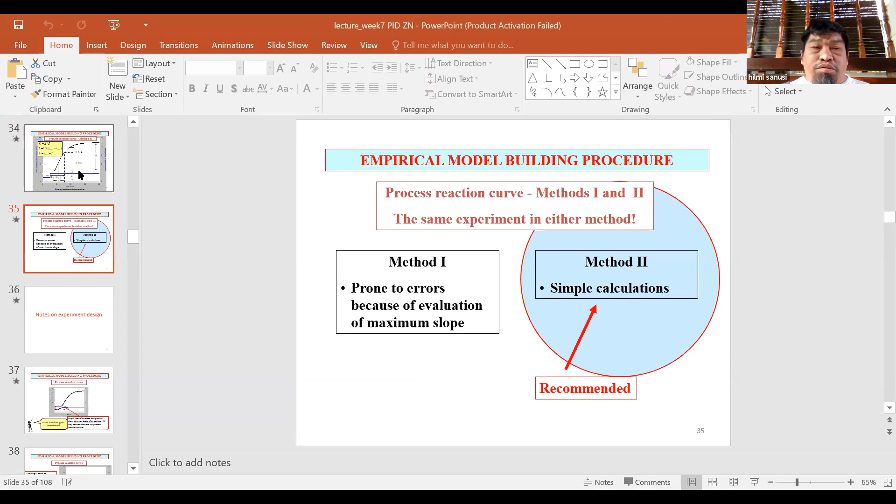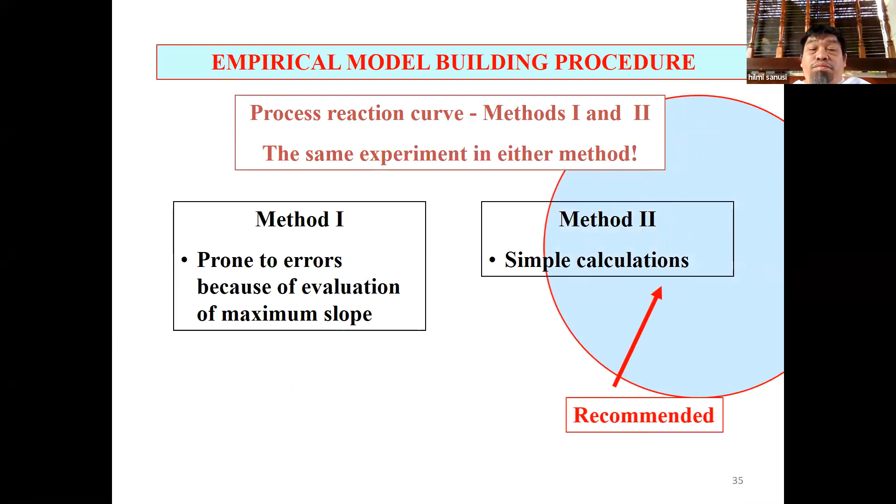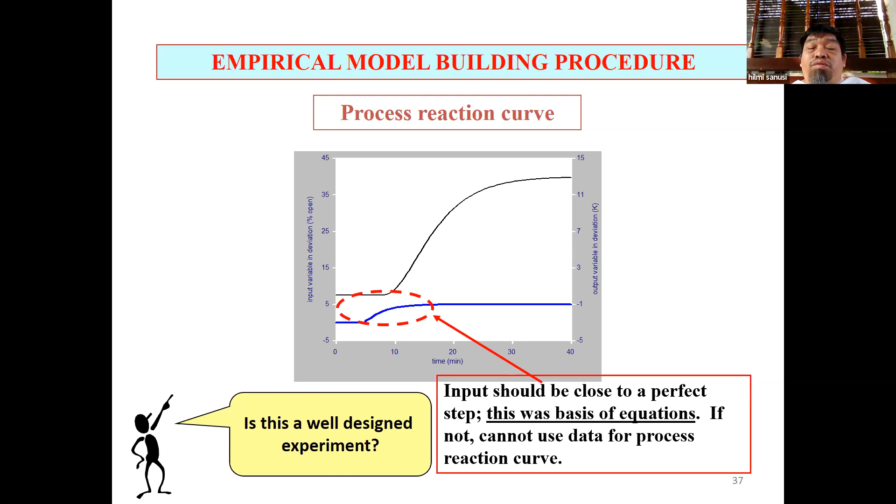So this is the dead band. So this input should be close to a perfect step, but this was basis of equation. So if not, we cannot use the data for process reaction curve. This is empirical. So sometimes you just have noise. So the output must be moved enough. So this is with a single step, you can see the signal to the noise ratio. So if we have this type of noise, can we use this in our calculation?

Okay, so we assume that there is a step. Then we have some delay. So this is dead band. And then you measure what is your input, your rise time. Then you have, bila dia dah rata ke atas tu, that will be your steady state. Then you take the 63%, that will be your rise time.

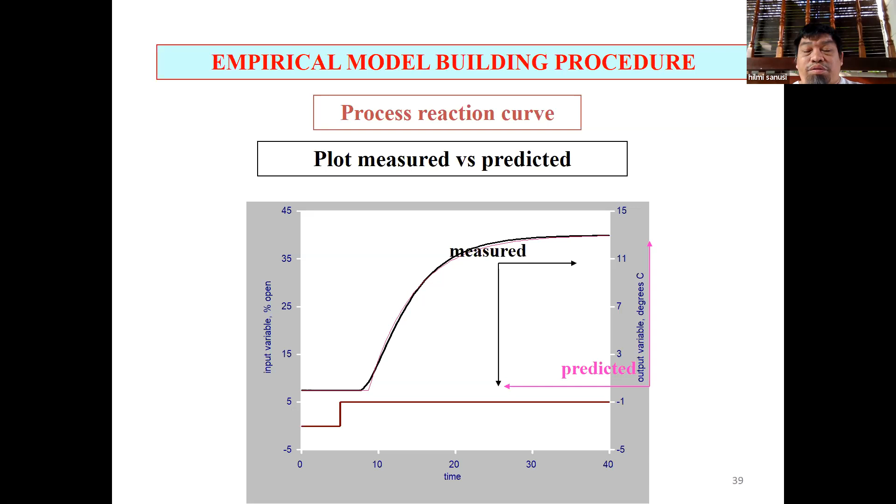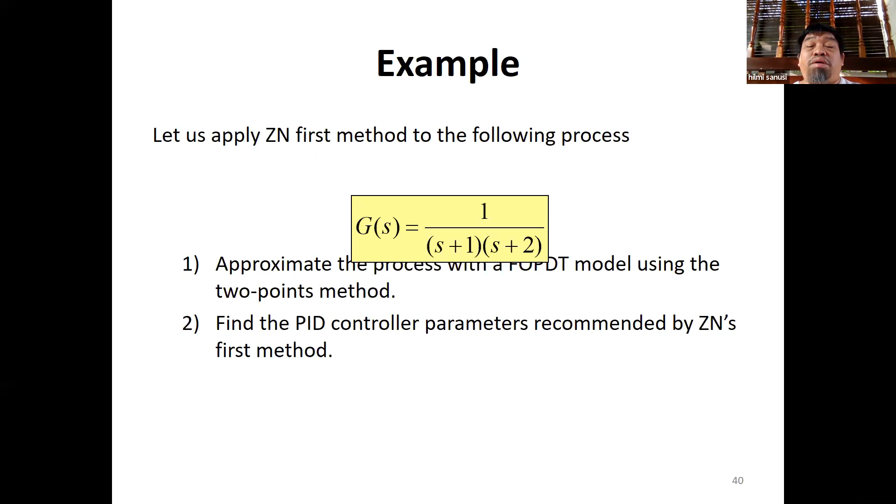So you can use a Ziegler-Nichols approach for 2-point methods. Then you find the PID controller parameter recommended by Ziegler-Nichols first method. And then this is the examples. You use this thing, and then you apply dalam your MATLAB, then you can see macam mana the response. Okay.

Ziegler-Nichols second method, this is ultimate cycle. So dia punya tuning dia slightly simpler. So first method use open loop. Second method, use closed loop. So if the process open loop is unstable, or if it is stable but does not give the S shape as you want in the open loop, so dia tak ada dead band. So you cannot find the dead band, and then you cannot find what is the slope. So second method is slightly easier.

So you put the process under closed loop control, and then you use a proportional controller. You vary the gain, and then you create a small disturbance in the loop by changing the set point. Means that you change the input, and then you change the gain. So it adjusts the parameter, proportional gain. So you vary the input. Let's say input daripada 1 jadikan 2 atau menjadikan 5, and then you bagi gain dia lagi besar. And then you record the gain, sampai dia start to oscillate.

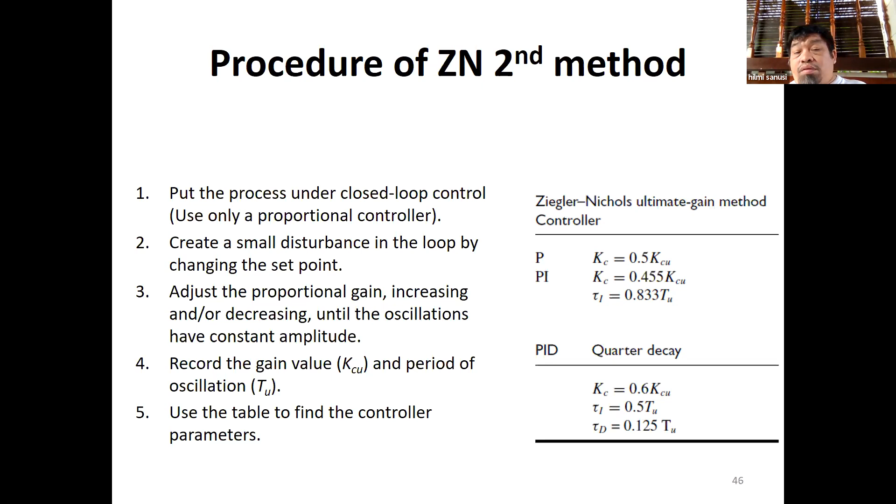Okay. So sometimes dia ada apa dipanggil sustained oscillation. So you change the set point, you change the gain. Say in this example, set point you change daripada 1 jadikan 200 degree Celsius, and then you change the parameter, you increase from 1 to 3, then daripada 3 some oscillation.

Let me see whose mic is on. So I'm asking to, sorry, somebody accidentally switched on the mic. Okay.

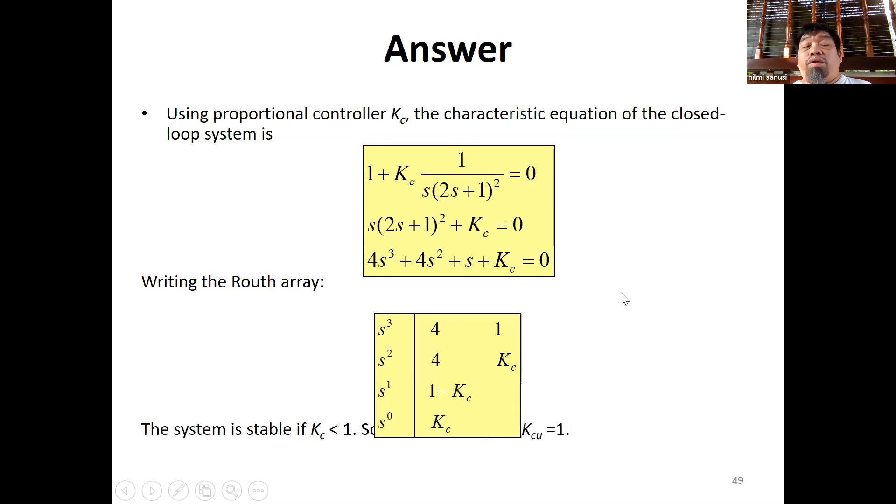Then when the oscillation frequency is stabilized, you have a constant amplitude of oscillation. So this is when the ultimate frequency is being used. So you just change your set point dengan gain. So you set the gain sampai they oscillate, and then you slightly adjust the input so that you have a constant amplitude of oscillation. Then daripada situ you dapat what is your period and what is your gain. Okay.

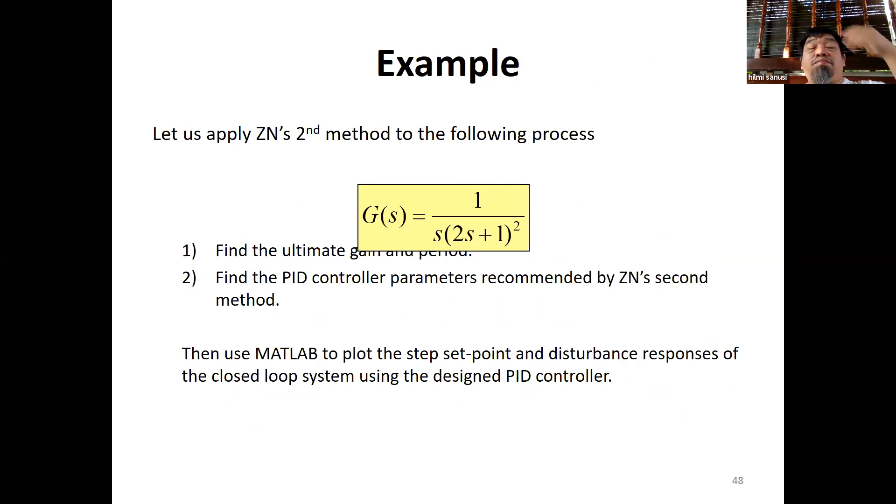So you can apply, masukkan kat dalam situ. So this gain is actually sama dengan what you gonna get dalam your root locus punya criterion. Okay. So you just apply, based on the ultimate gain, for PID, Kc is 0.6 times the gain of the calculation. TI is 0.5 times the period of oscillation. TD is 0.125 of the period of the oscillation.

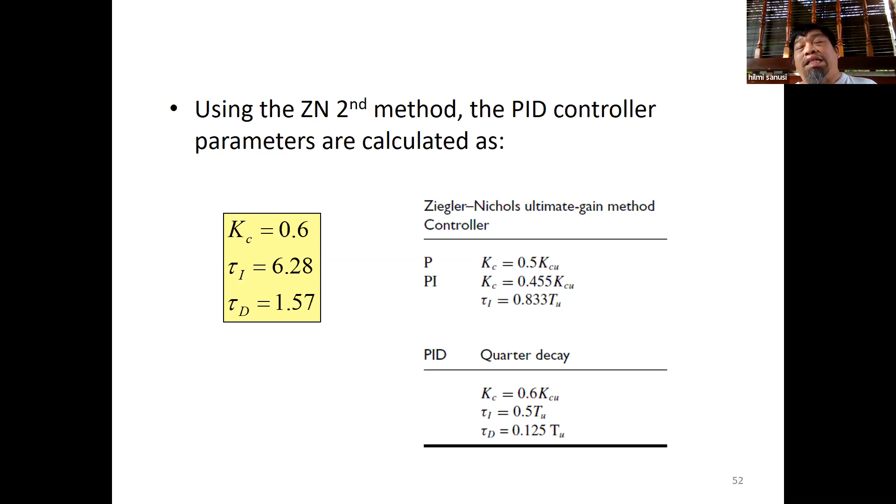You can see kat sini TD is about, berapa kali ni? 4 kali lagi kecil daripada TI. So this is quite normal. Kalau you nak main teka, selalunya TD kita set dulu. Nanti if you look at the assignment yang saya bagi, saya suruh you pakai visual methods. Nanti kita tengok visual methods. So selalunya in visual methods, kalau kita nak try, we set TD to be 10 times smaller than TI. That's a rule of thumb. Okay.

That's another method of finding the ultimate gain KC, by using root locus. We just move around the locus until it crosses S equal to 0, then you get your gain. So in this case, this is not experimental. This is based on, what's it called, simulation using MATLAB.

So you have two: one uses the real experiment in a closed loop system. The other, you build the closed loop, you simulate using MATLAB and you look for your ultimate gain for the oscillation. If you use MATLAB simulation, sorry, not just MATLAB, if you use simulation, then you are not adjusting the set point to get the oscillation. You just drive the poles so that you know that that location will oscillate.

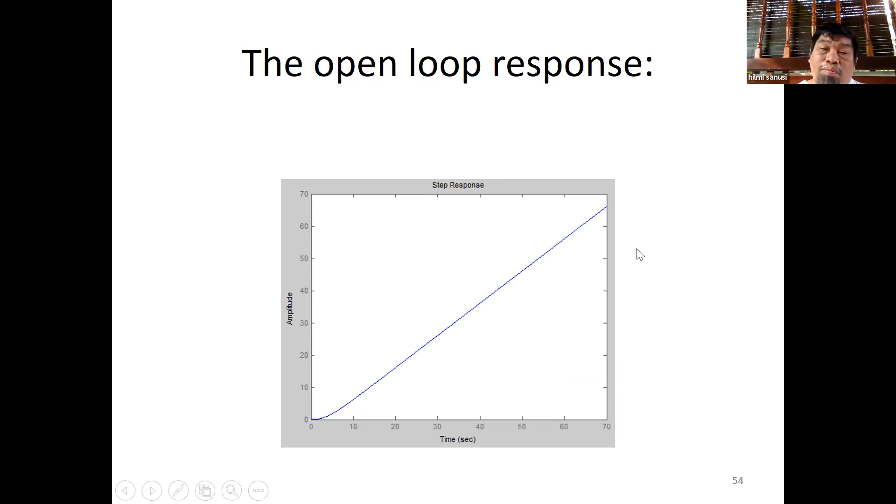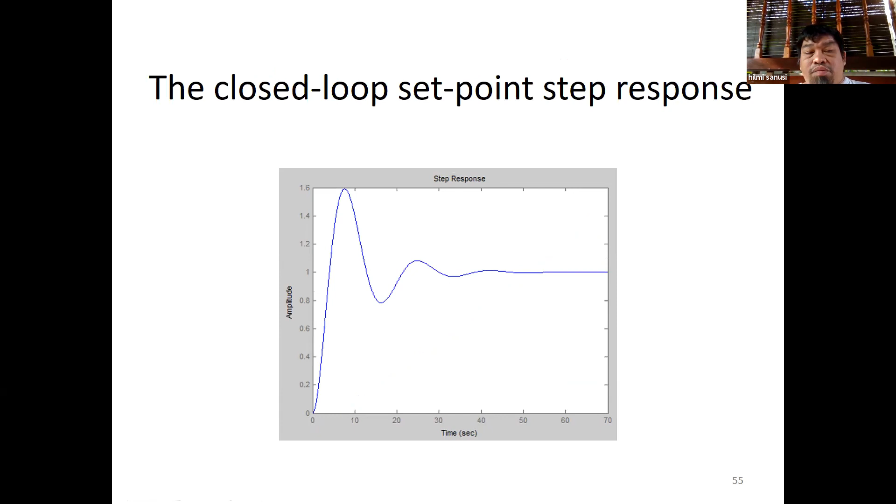So this is a simple conclusion of the second method. You set Ti to infinite, Td to be 0, and then use a proportional control. You just change its set point, meaning you change the input slightly, and then you increase the gain Kp from 0 to a critical value where the output starts to oscillate and produce a constant oscillation. That will be your critical gain. Okay.

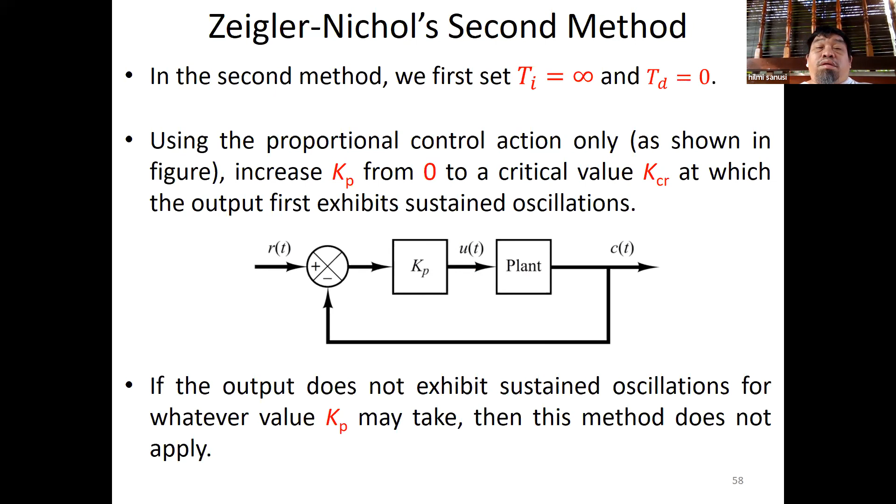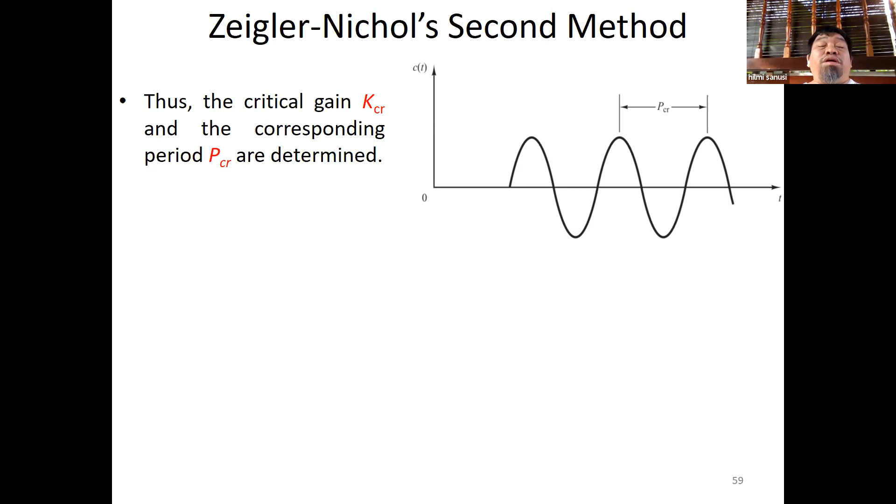So once you get your critical gain, then you'll get your period of oscillation. From there you find what your oscillation period will be. So you will get those two values, critical gain and period of oscillation. Then the table is good enough to give what will be the KP, KI, and KD.

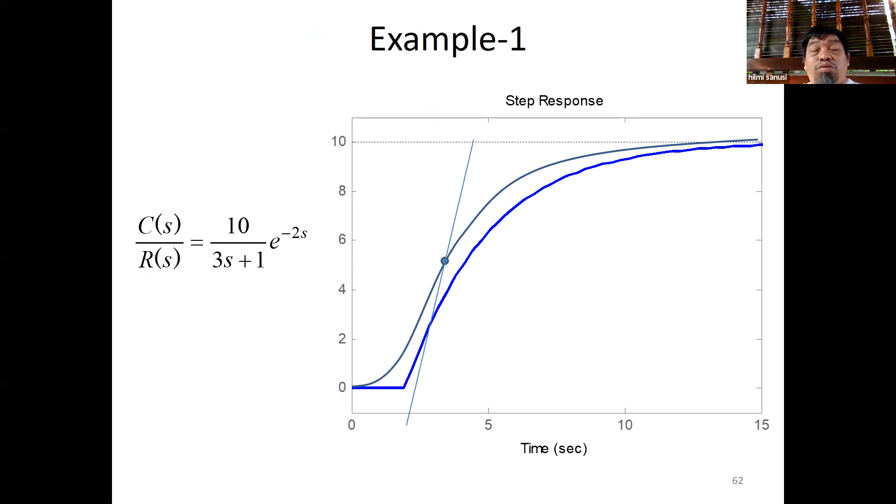This is another example. You can see how to do the tuning. Okay, can we? If, for example, it has an S shape like this and then you use the second method, yes you can. So the second method is based on closed loop oscillation. The first method, if you have just the open loop, it's not used in the closed loop. So that's another example. You can take a look at the examples.

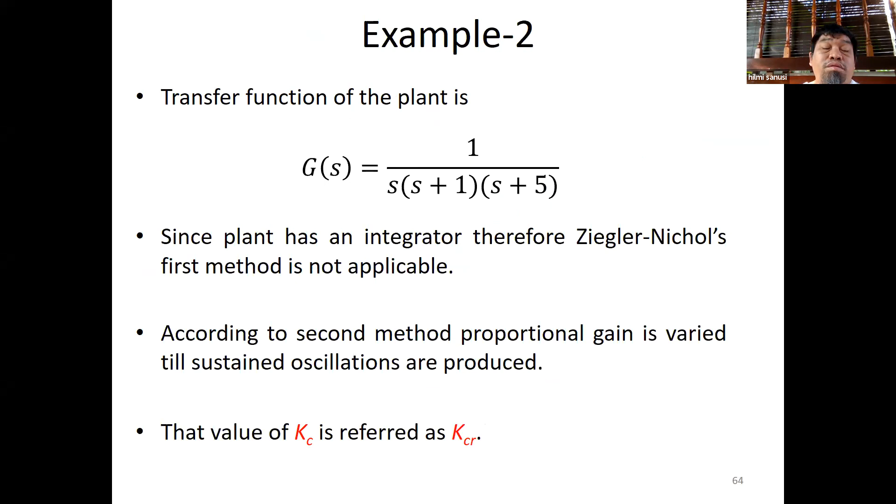So you get your critical gain. To get the critical gain, you can use root locus, or you can use the Routh criterion. And then you just drag this thing. So this is another example, using the Routh criterion to get your KP, your critical gain. Same thing. So once you get your KP, you put your KP in here, then you will get your J omega. You can use MATLAB to do this too. If using the Routh criterion, does MATLAB have it? The old one does, the new one I'm not sure. We can check.

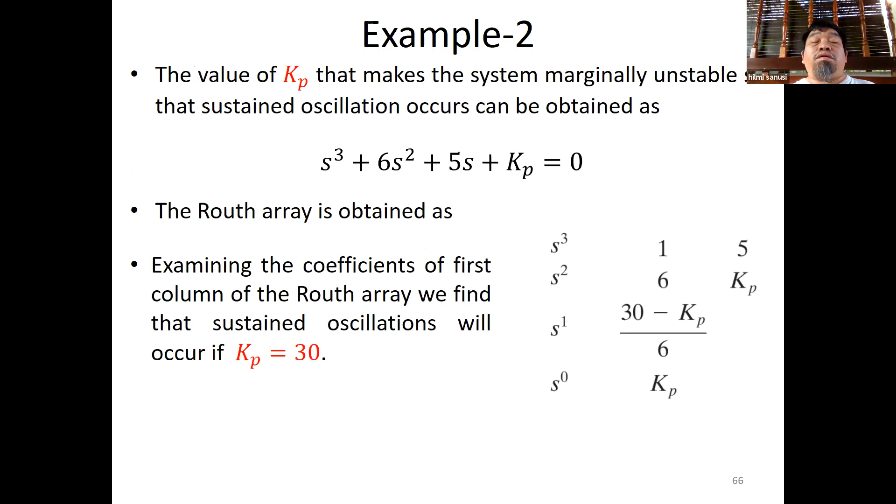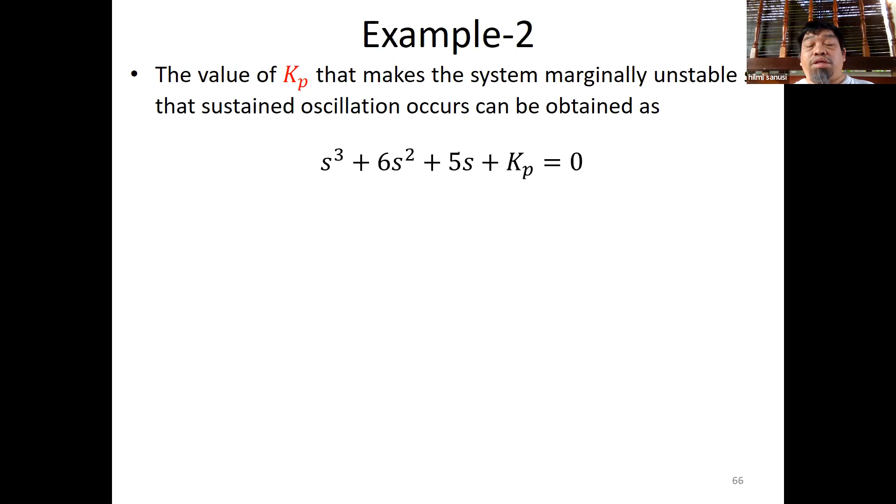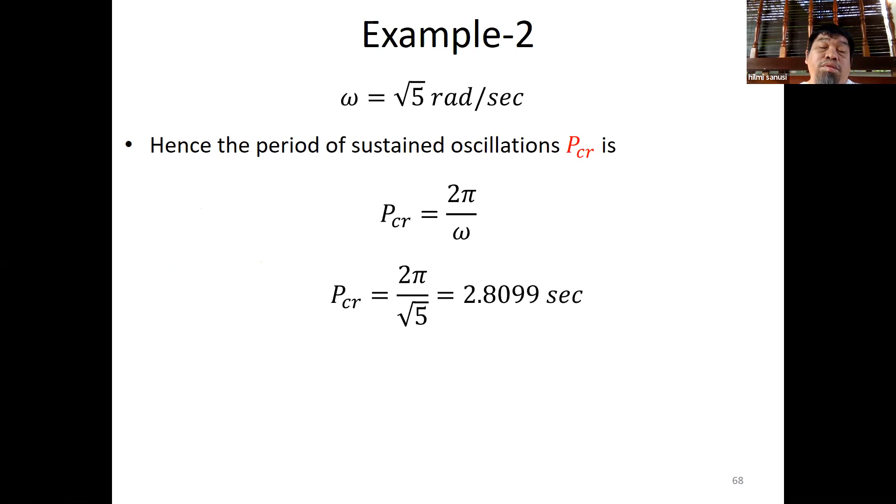Okay, if using this calculation, put your gain KP in there. If you look here, this is your transfer function. If you have your KP, then you get your closed loop. So KP over S(S plus 1)(S plus 5) plus KP. So from the Routh criterion, you put KP into this equation. Then you look for what your oscillation frequency will be. Once you get your frequency of oscillation, you get your period, like here. Your period is 2 pi over omega. Okay. Same thing.

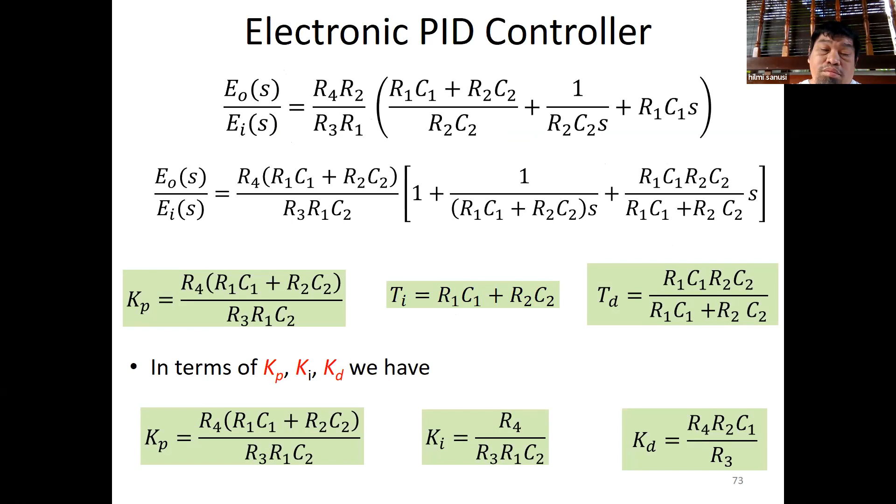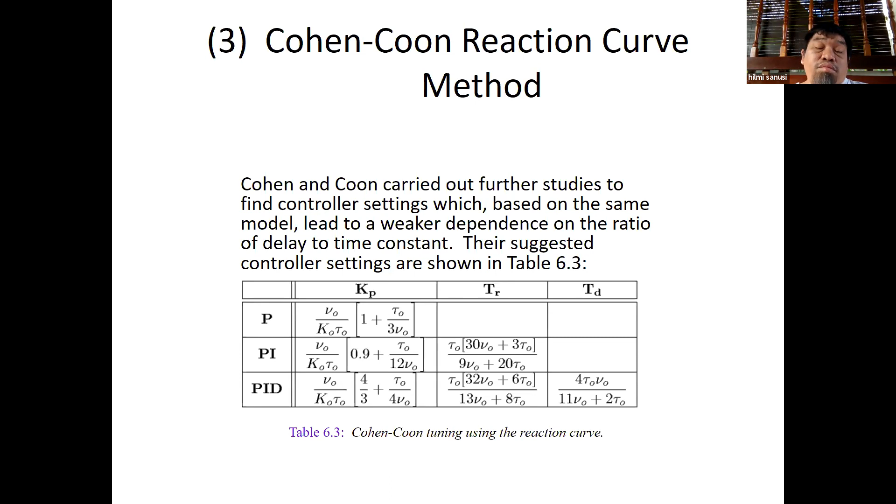So this method works well on processes where the dead time is less than 2 times the time constant. So kalau kita tengok sini ni, this is dead time, tau, dengan the time constant. So this method works well when the dead time is less than 2 times the time constant, suitable for use on self-regulating processes based on characterization of the process by a simple first order model with steady state gain K, time constant and the dead time.

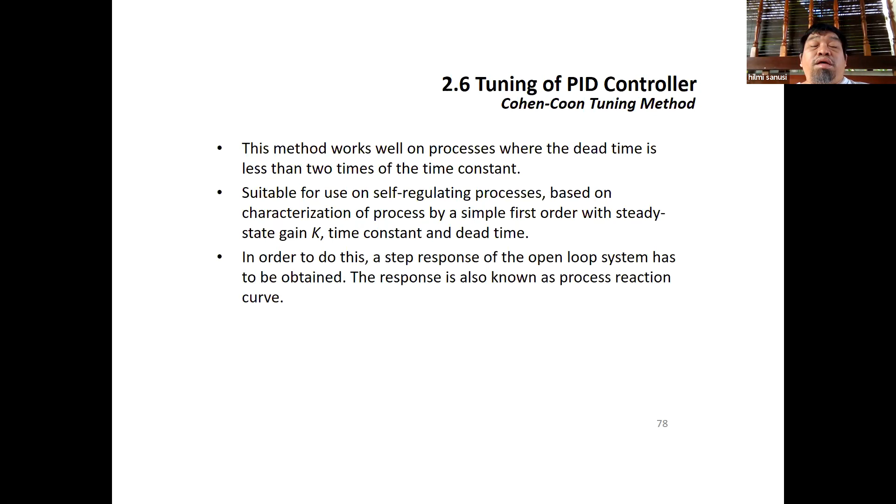So in order to do this, a step response of open loop has to be obtained, and then the response is also known as the process reaction curve, and then the reaction curve must cover the entire test period from the introduction of the step until the system reaches a new steady state.

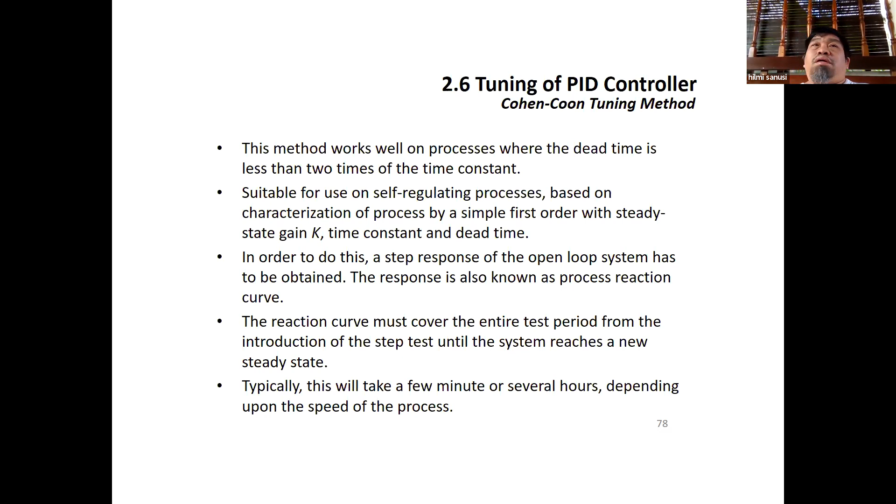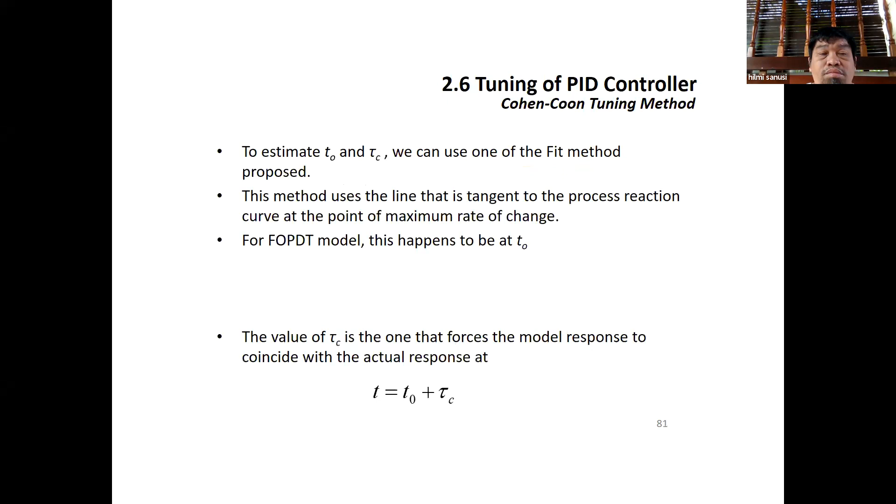So this is the gain. And then this is the rise time. Okay. From this, just plug into the Cohen-Coon tuning methods. Okay.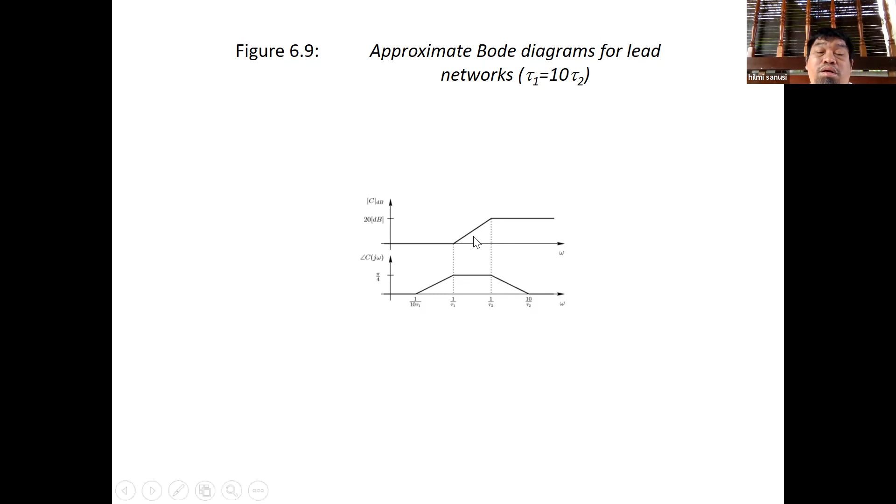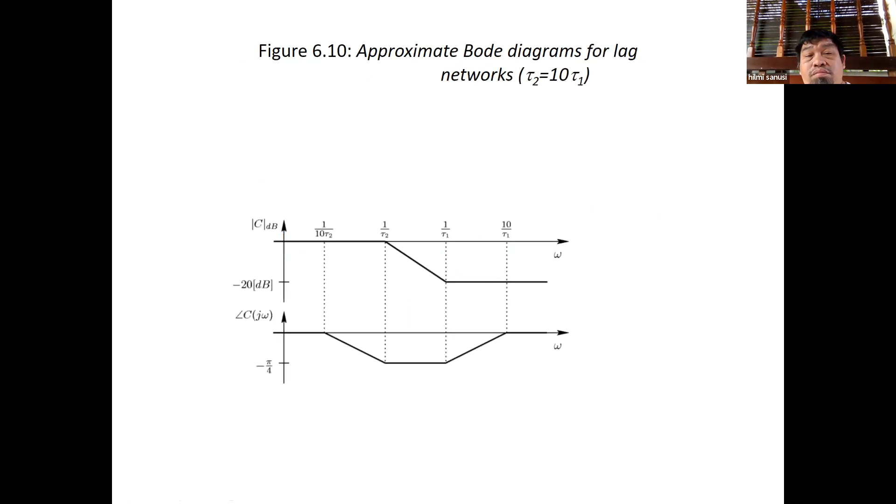So this is the magnitude, this is the phase. So the effect is about the same as the reaction in PID. Okay. So Ziegler-Nichols closed loop tuning methods.

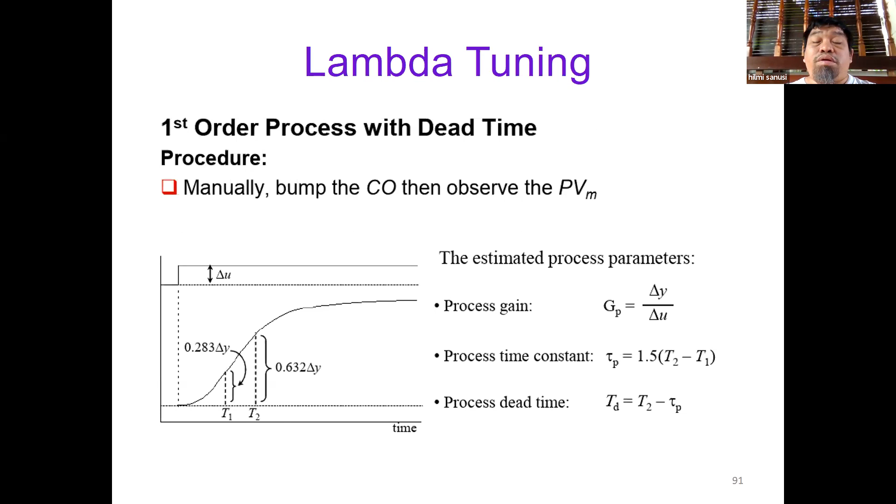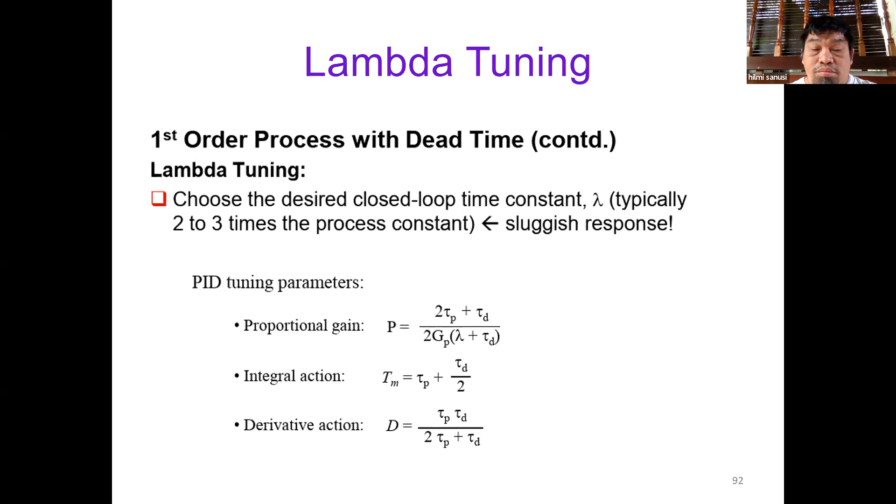So dia varykan value, typically 2 to 3 times the process constant. So this lambda is the one that you want to tune. Okay. So this is how you want to implement lambda tuning. The filter time constant should be less than 1/5 of the process time constant. The closed loop time constant is usually greater than the process time constant. Okay.

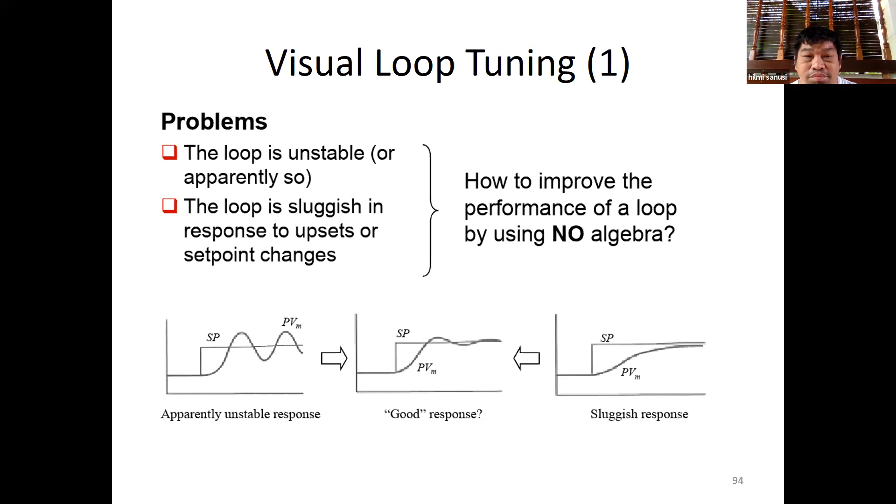So first you look for instability. Dia ada oscillation ke tak? If there is an oscillation because of excess feedback or being perturbed periodically by another process. So the procedure is to put the loop in manual, and then in the manual loop the process appears to settle down. So kita tengok dia punya response. And then kita tengok if the oscillation is caused by too much or too little gain in the forward gain, KI ataupun KD, or in the combination.

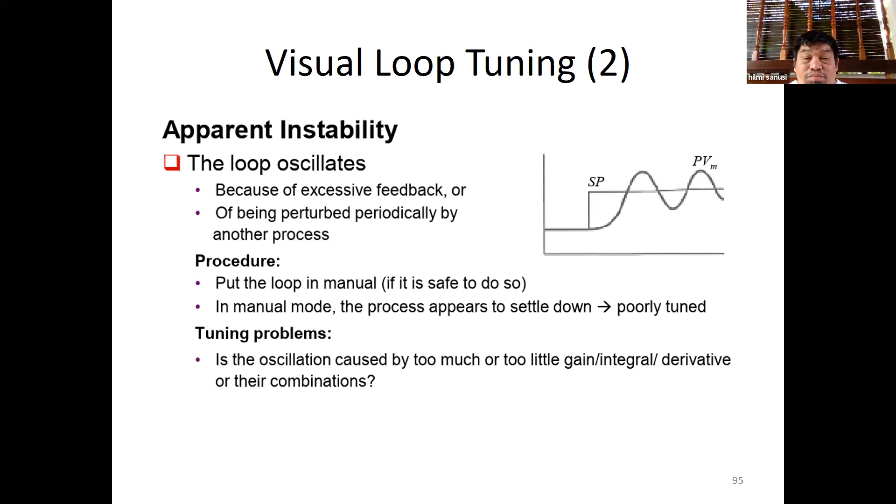So macam mana kita nak tahu? Kita just vary some of this gain. Okay. If the value of IM is less than half of the oscillation period, tau, so first you increase the value of integral. And if the value of integral is longer than the oscillation period, it is safe to decrease your proportional gain.

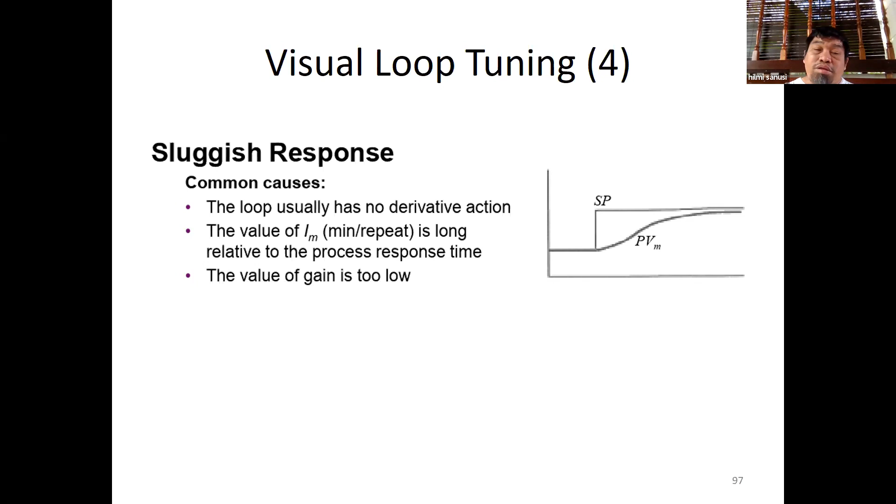So kalau the system tu sluggish, slow, so you set the I to the longest, and then set your derivative to be 0, and then place a controller in manual mode. Then you increase your gain.

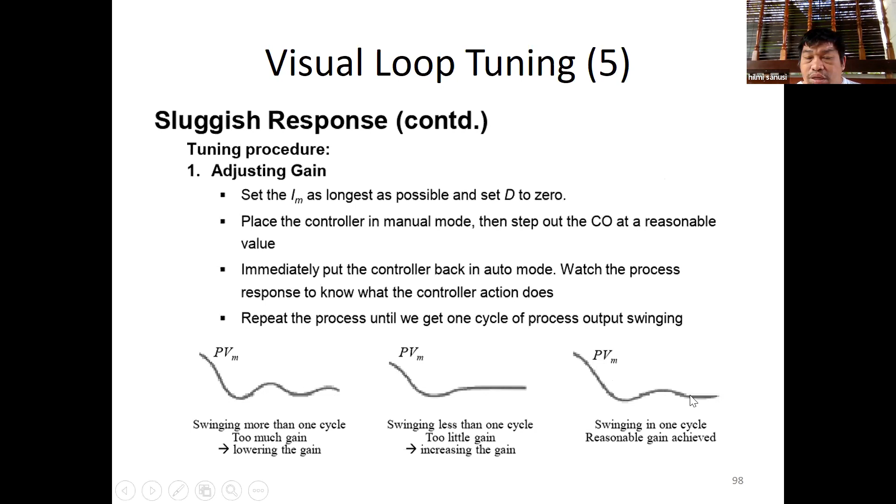Okay, so you repeat this thing sampai dapat one cycle of process output swing. So this is swinging in one cycle. Dia swing, 1, 2, lepas tu dia mati. Kalau ini 1, 2, 3, 4 ini setengah cycle. This is one cycle, and then the steady state.

So once you get this, you place a controller in manual, immediately put the controller back into auto mode. Means that you introduce the feedback, and then you masukkan balik dalam, so that you can adjust PI dengan D, and then we get a new PV back to a set point about half of the fastest as it move away from the set point.

So the response with a reasonable gain, dia ada one complete cycle, and then you increase slightly KI, and then kita dampen this thing dengan your KD.

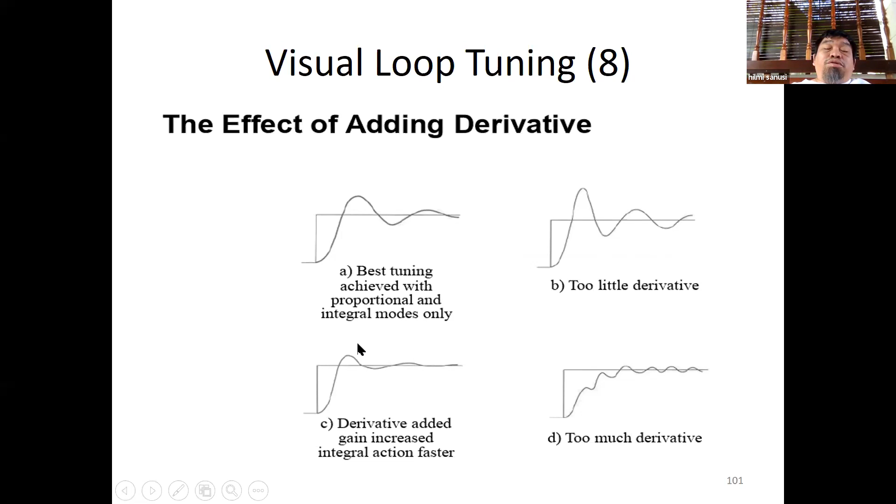Auto tuning, saya tak masukkan lah dalam apa, tak ada sebenarnya dalam syllabus. Tapi memang selalu ada auto tuning ni, pergi mana-mana pun orang akan cerita pasal auto tuning. Auto tuning ni let the PID tune by itself. It will self-adjusting the P, the I dengan D. So you don't need to do anything, it will adjust by itself.

So how can we do this thing? So the process is non-linear or operated under widely varying condition. So you need various combination of tuning parameter for different operation condition. So this thing you can accomplish by using previous experience yang operator dah buat. Kalau dia buat macam ini, dia letak P value je macam ni, KI, KD value, it will looks like this. So based on this parameter, kita masukkan di dalam jadual.

So the process characteristic will change rapidly. So you have your frequent manual changing and tuning parameter cannot be expected to be able to produce satisfactory result. So the user doesn't have the knowledge or experience for the successful manual tuning.

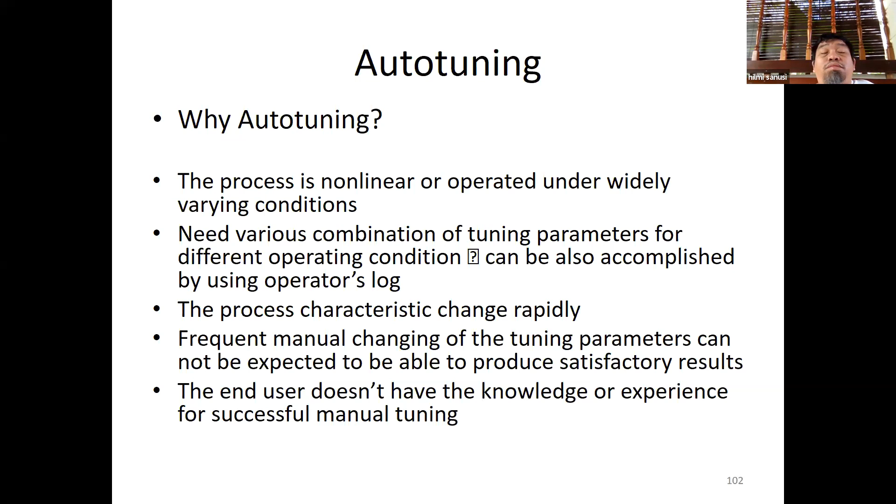Kadang-kadang ada orang guna black box tuning, black box PID. So you don't need to know the system. So dia pakailah artificial neural network to do the tuning. So dia masuk, dia pakai previous value, previous experience, let the machine learn by itself. So ini AI lah, artificial intelligence.

Kadang-kadang kita tak pakai macam tu, kita pakai auto tuning tapi yang lebih robust. Saya pun tak ingat apa benda yang saya buat sebelum ni. Kalau saya ingat, saya beritahu. Satu lagi dia gunakan table. Dia panggil scheduled tuning. Satu lagi dia pakai on demand tuning.

Satu lagi dia pakai online tuning. Online ni it will change. Dia tak ada break off. Dia continuously dia will change. Kalau jadi macam tu, dia terus tukar.

Siapa yang tak jumpa pula siapa menyanyi ni. Siapa menyanyi ni? Sampai ke bawah. Vishnu tak ada mikrofon. Vishnu bisu.

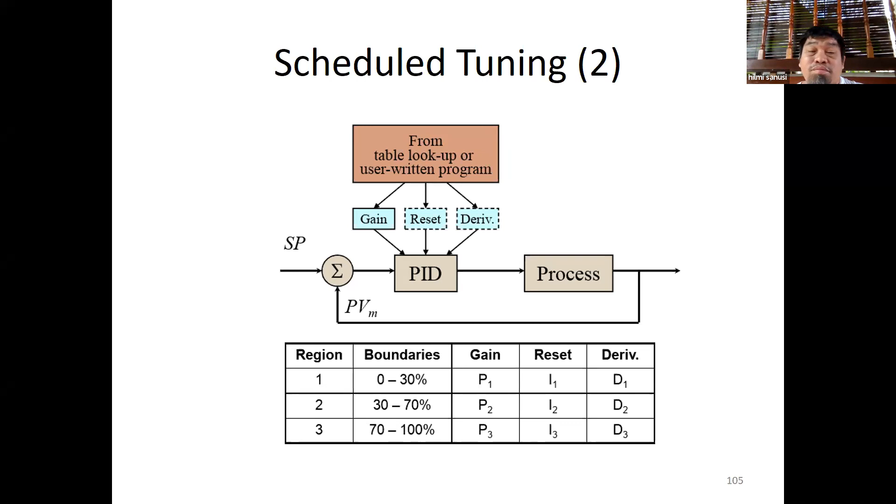So for on-demand tuning, if it's open loop, we directly use Ziegler-Nichols lambda tuning. If it's closed loop, we use relay feedback auto-tune, motivated by Ziegler-Nichols closed loop, and then tune. Or the user uses a tune button to start the tuning procedure which is carried out automatically.

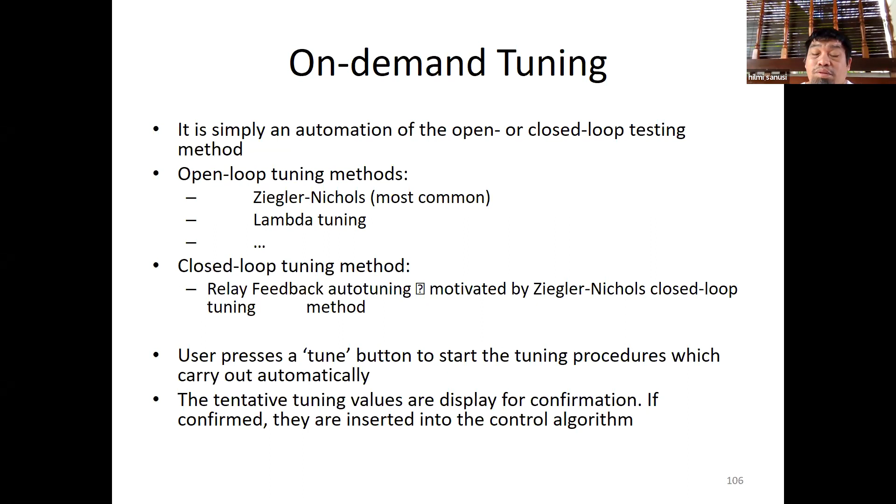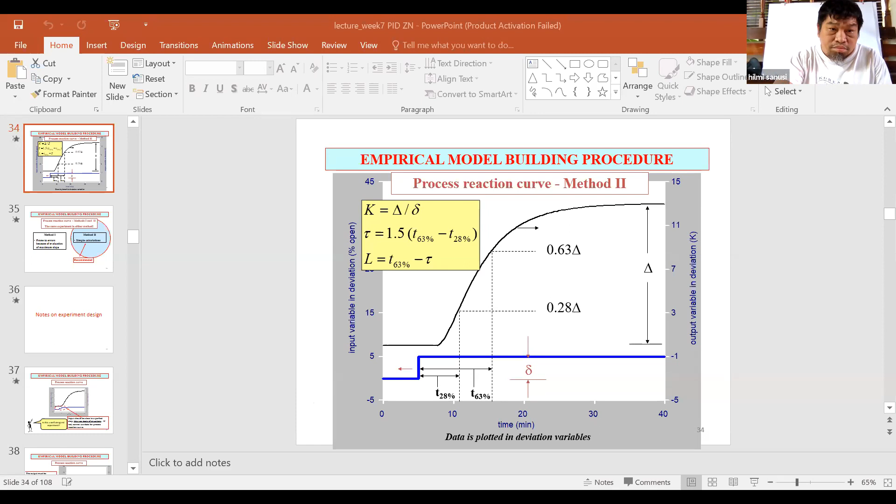I found a very good note by Alberto Bemporad from the University of Trento, Italy, on loop shaping. This is a very nice note, I'm very interested to use this note for the class. So I'll do a few things.

So this is what the relation is if we look at QFT. So how do we get the relation between time domain and frequency domain? What is the relation between time domain and frequency domain? How can we relate this?

Anybody? Let me turn on chat, let's see. Where is my chat? What is the relation between frequency domain and time domain? There must be some relation between frequency domain and time domain. Okay never mind, this is a bit difficult.

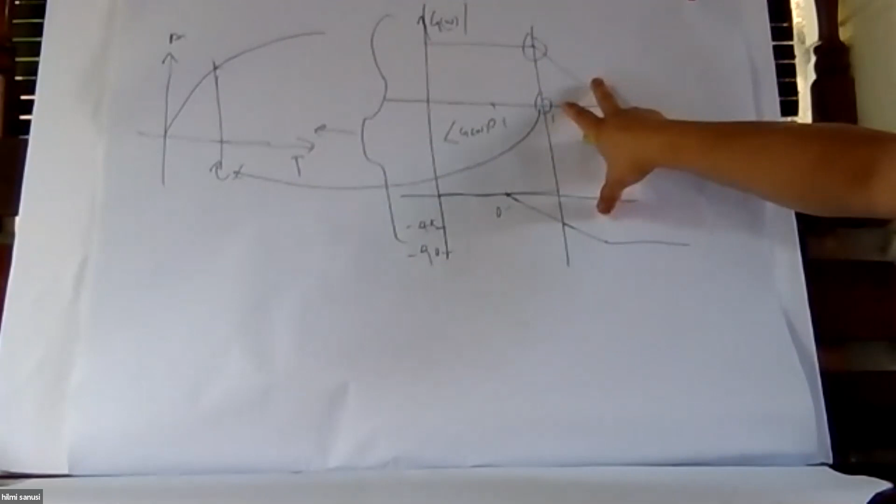Come back to this later. So I will... okay.

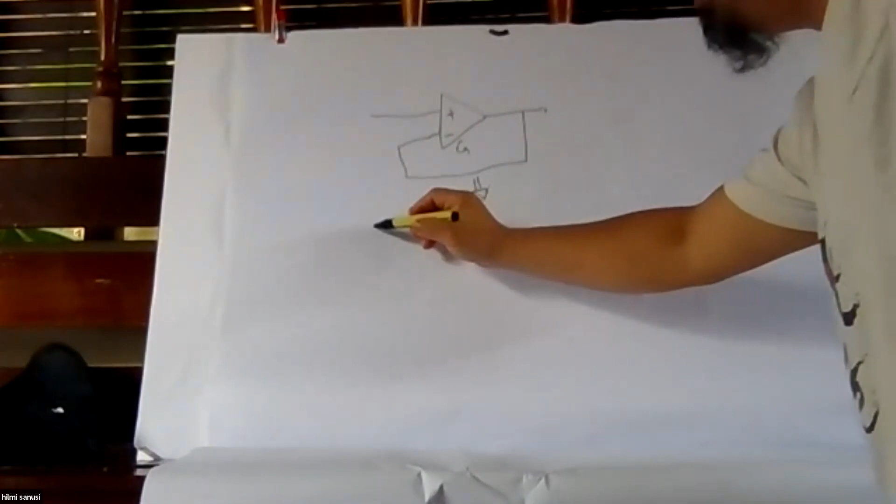Let's say I have an op-amp. Let me unshare the screen. Stop, share. Okay. Let's say I have the op-amp. Okay. Op-amp ni dia ada open loop gain. So this thing sama juga dengan kalau kita tengok kat dalam control system, this is something like this. This is gain. Unity feedback. Gain kat sini ni contoh open loop gain 300,000. So this is 300,000.

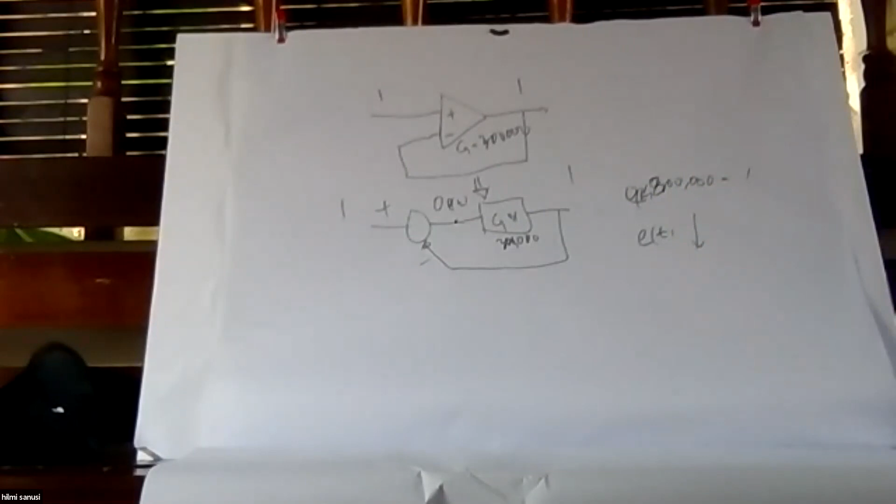So apa yang kita nak? This error to be very small. The smaller the error, the better. So kalau macam ini, kita nak bagi error ni lagi small, kita kena bagi gain ni lagi besar. So maksudnya error ni 1/300,000. Kalau saya ada sini 800,000, maksud error ni 1/800,000. So I will make this error to be very small. Kalau misal kata output saya macam ini, my gain ada some response like macam tu. Say this is my gain amplitude, contoh lah. And then my output will have something macam tu.

So kalau saya feed this thing back, saya tolakkan dengan satu, so dia akan ada reverse, and then I have the error. So this is the thing yang kita nak tengok, how the error will actually behave. Itu yang sebenarnya kita nak tengok. Because this is the output. This output kita tolakkan dengan kita punya input, that will become your error. So error times the system will get the output. So kita nak tengok macam mana kita nak buat satu controller so that this controller actually will modify the error signal. So kalau kita ada certain frequency band of the system, and then output tu ada certain frequency band, so kita nak filter.

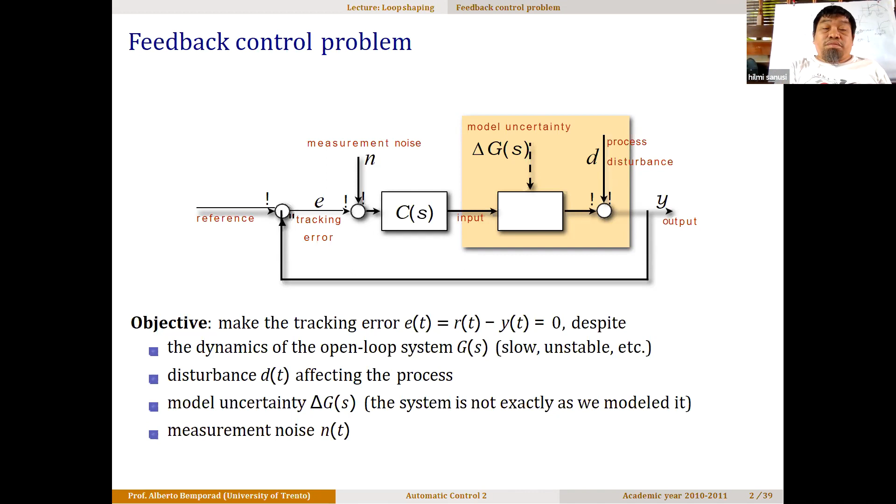So to achieve the objective, kita nak design satu feedback control yang satisfying a number of requirements: the stability in the nominal condition, stability in perturbed condition, static performance, and then performance transient dengan frequency response yang can reject noise and attenuate, so that it will be insensitive to the measurement noise. And then kita nak controller tu to be feasible.

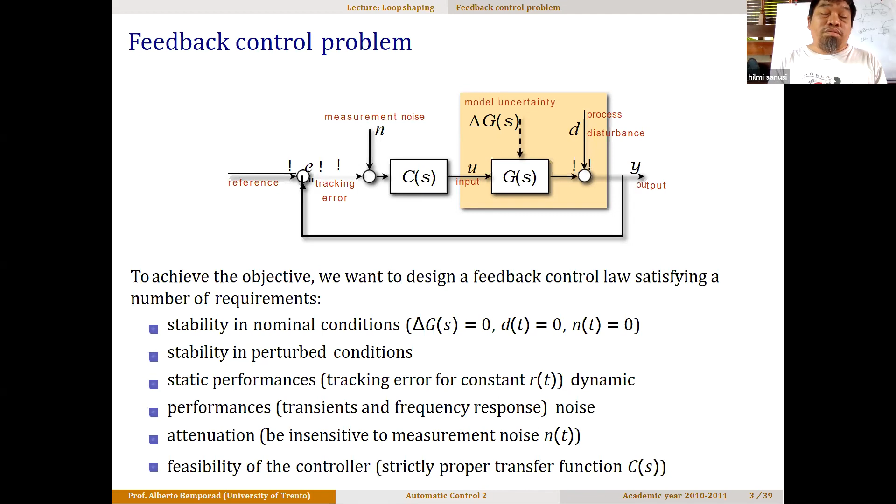For this, if we have a system G(s), then we will choose the controller or the compensator to shape the loop function so that this will give us the bounded criteria that we set. And that's why this is called loop shaping.

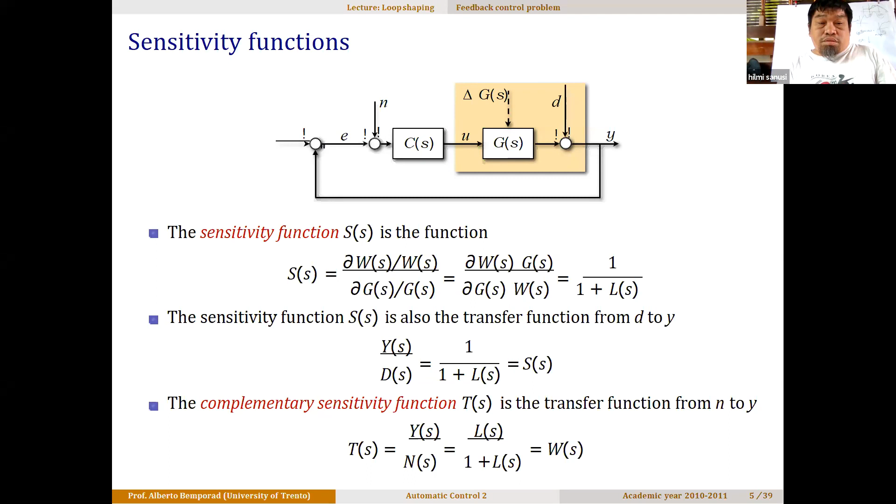So kalau saya ada transfer function and then complementary to the transfer function, if I add this thing up, how can we make this thing small? So the solution is to keep the sensitivity function to be small at low frequency. Then we have the closed loop punya system magnitude to be 1. So this thing will be very good for tracking. To keep the complementary sensitivity to be small at high frequency, then this thing will have a good noise rejection.

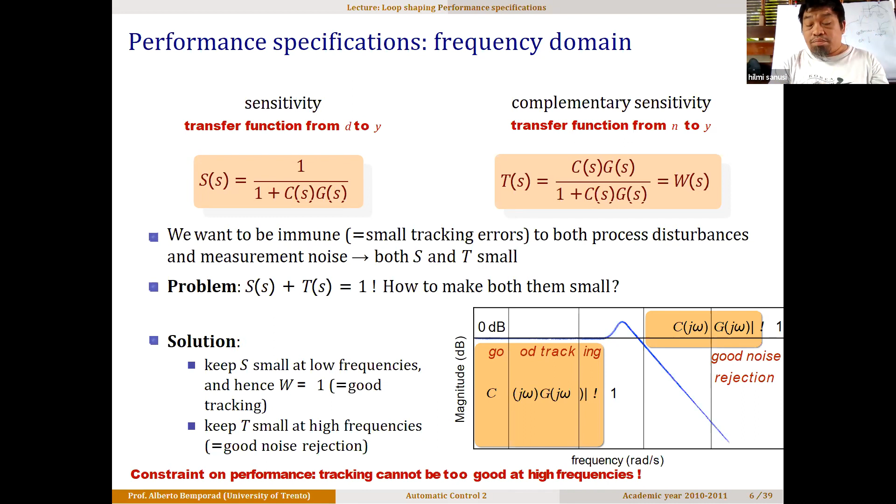So the performance specification in frequency domain, we usually refer to the regular closed loop system, to the similar second order. So we have this 1 plus 2 zeta over omega n s plus s square over omega n square. So this is sama dengan s square plus 2 zeta omega n s plus omega n square. Same thing, kita ambil omega n bawa ke bawah semua. Okay. We have the resonant peak, and this is the maximum value of the closed loop punya transfer function.

And then the bandwidth of the closed loop system is the range of frequency at which the magnitude of the closed loop system is, apa dia panggil, 20 log, is about the amplitude in the log. So this is within the minus 3 dB. So this is the bandwidth.

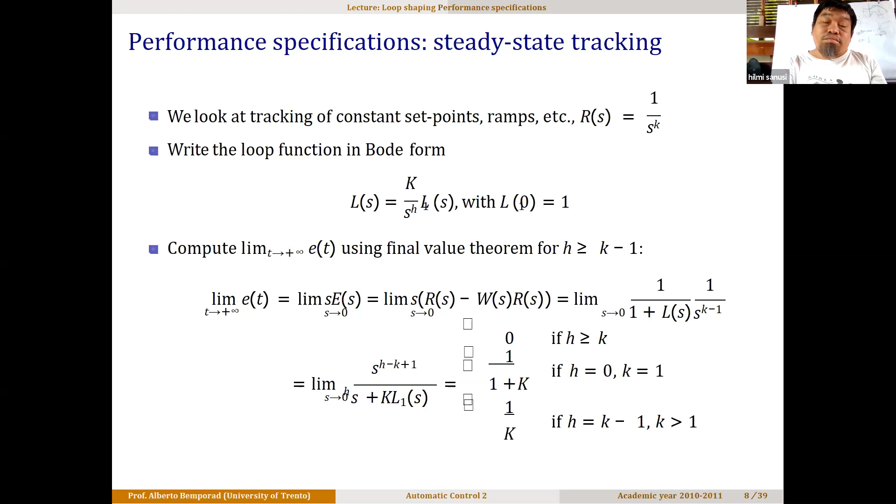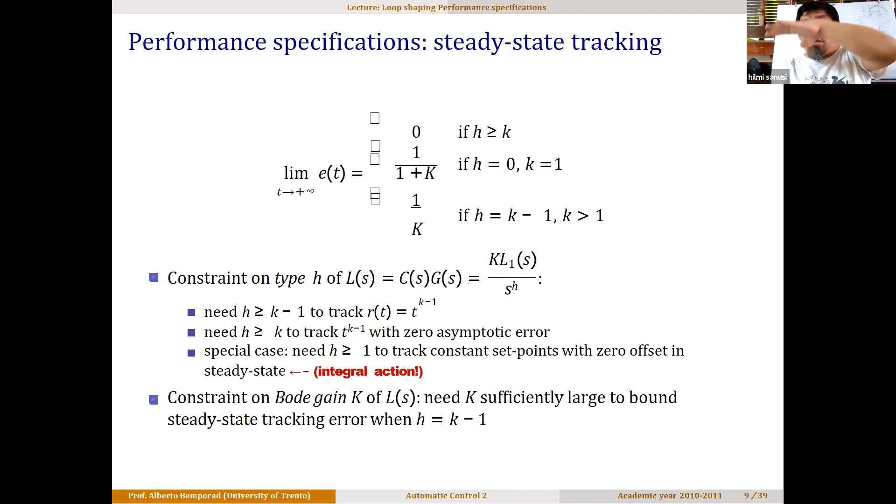So the constraint of the Bode gain of the forward loop will need some gain sufficiently large enough to bound the steady state tracking error, apa nama ni, poles just 1 degree higher than your zeros. Contoh dia s square plus something something over s cube plus something something. Okay.

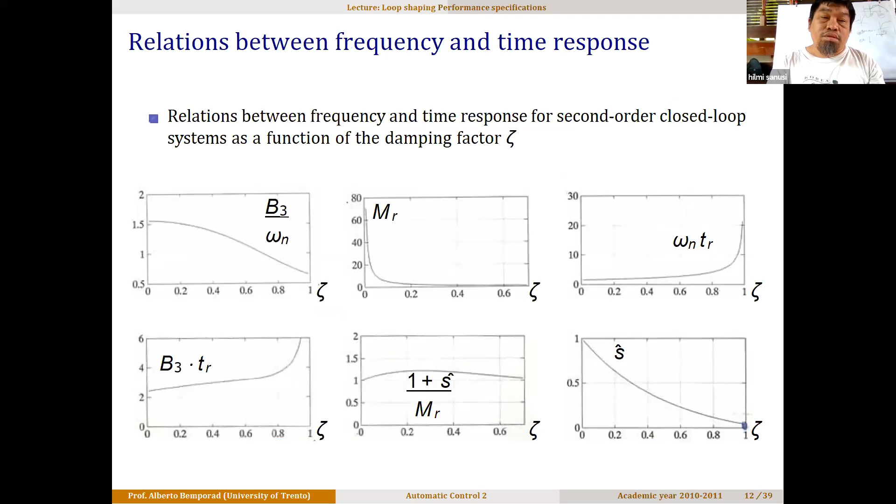So the relationship between the frequency and time response in the second order closed loop as a function of damping factor. So boleh tengok sini, this is zeta dengan omega n. So the controller synthesis through loop shaping. So apa yang kita nak? Kita ada typical loop function as specified by h, and then kita ada tracking error in the steady state. And then kita nak some dynamic to the system.

Kalau still remember black box punya eksperimen, macam mana kita nak dapatkan dia punya apa benda tu? Dia ada static, dia ada dynamic measurement. Static ni DC, dynamic AC. Same thing in this. Kita ada DC which is step, and then kita ada some AC function which is ramp, sine wave, and so on. So kita nak design a controller that meets all the specification in one shot. That can be hard sometimes, but in loop shaping, apa kita nak?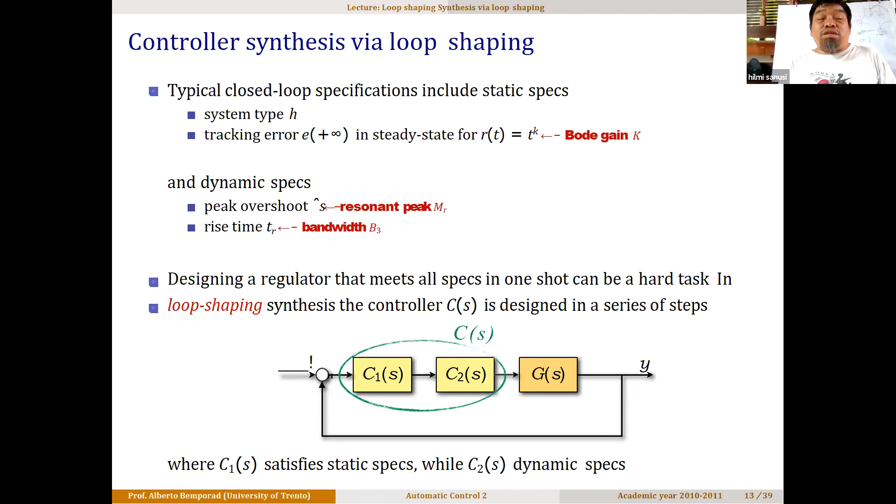Kita nak synthesize the controller that is designed in series of steps, where C1 will satisfy the static specification, and C2 will satisfy the dynamic criteria. So kita kan ada buat dua. Macam dalam your lead lag controller lah. You buat lead dulu ke, you buat lag dulu ke. Lag will do certain things, lead will do certain things. Sama juga dalam sini. Basically nanti bila you tengok, lead lag controller ni is actually a loop shaping.

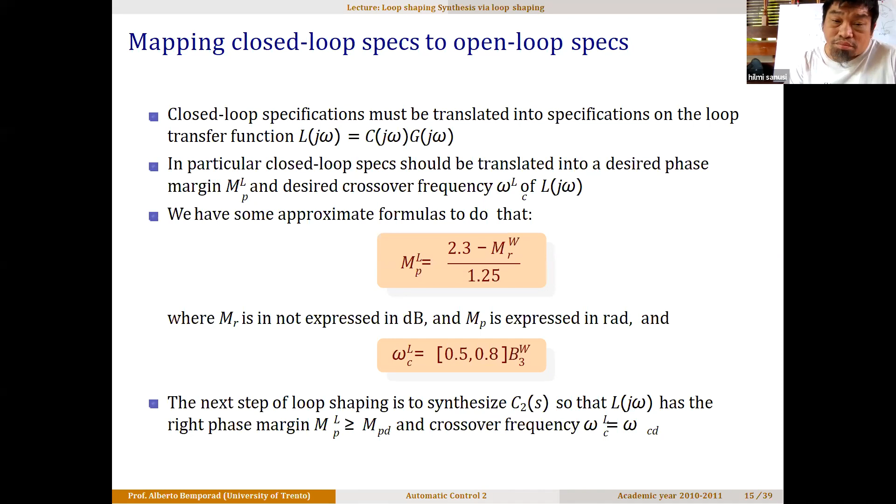So the next step is to synthesize the dynamic part of the controller. So the dynamic part is designed to guarantee the closed loop transfer function is asymptotically stable, and then C2 must be designed to satisfy the dynamic specification. So we focus on the controller containing only real poles and zeros, no imaginary.

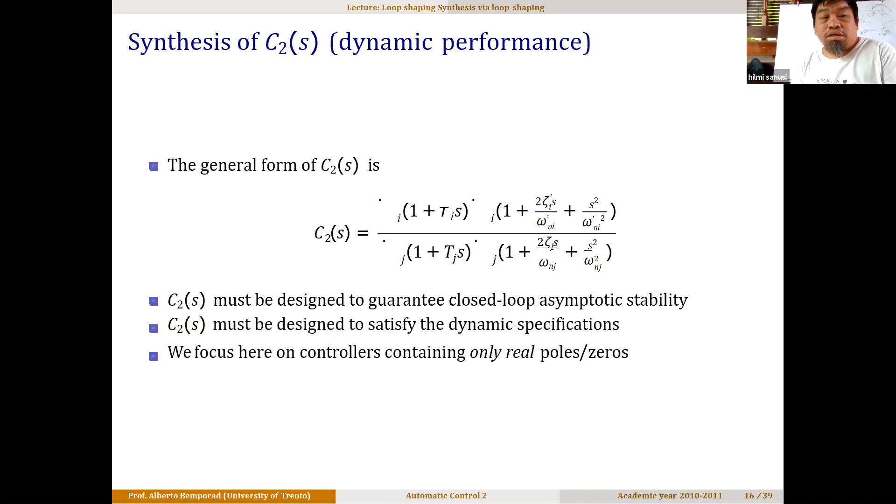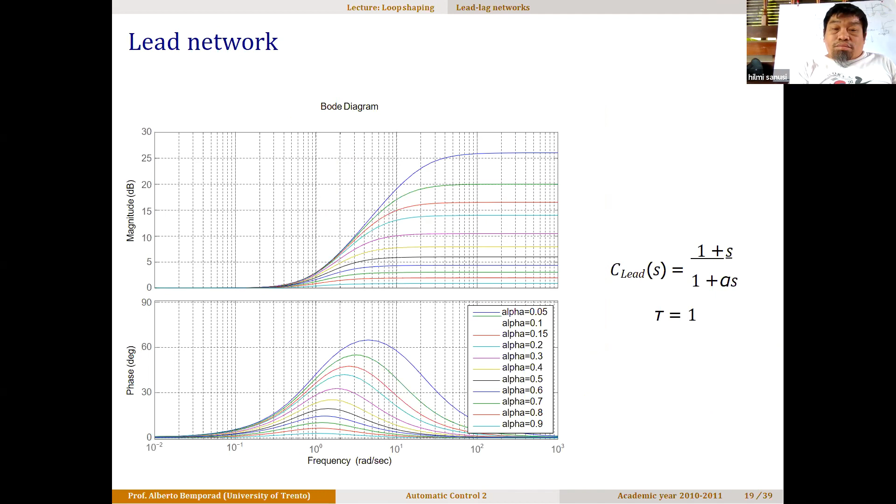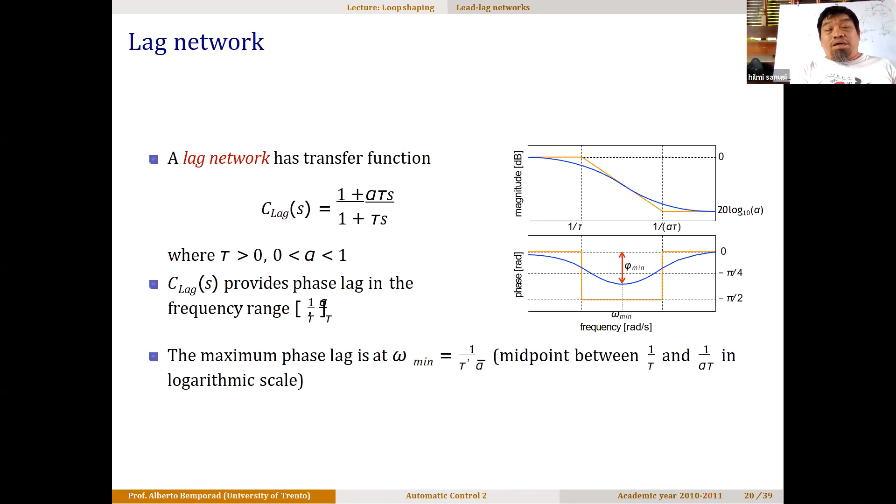So saya cut short sebab masa dah nak habis. Ada seminit lagi. So this is the lead lag network. Now, macam mana kita nak implement lead lag network dalam PID controller? Sebab PID controller dalam industri dah ada PID block. So we will implement the loop shaping dalam PID so that we can establish the PID using loop shaping.

So saya akan sambung sikit esok dengan minggu depan. Minggu depan ada sikit loop shaping plus introduction to digital control. Esok you hantar assignment dekat iFolio. Esok kita akan review the assignment yang saya bagi, which is a transfer function. You implement Ziegler-Nichols dengan Cohen-Coon.

Based on these two and based on your observation of implementing PI dan D and open loop, you buat visual tuning. Bila visual tuning, tak akan ada benda yang sama. Tak macam Cohen-Coon dengan Ziegler-Nichols. Kalau pandang gunung tu cantik, tak semua orang cakap gunung tu cantik.